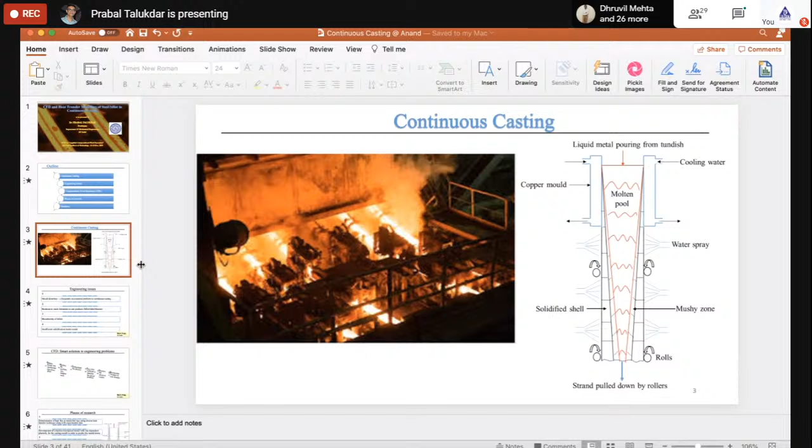Excuse me sir, your slides are not changing. Yes, now it happens when I take full screen mode, then it happens like that. Then I have to do it in presenter-like mode. This is now, I think, visible, right? Yes sir, it is visible. So your screen will be slightly smaller, but then we have to go with this one.

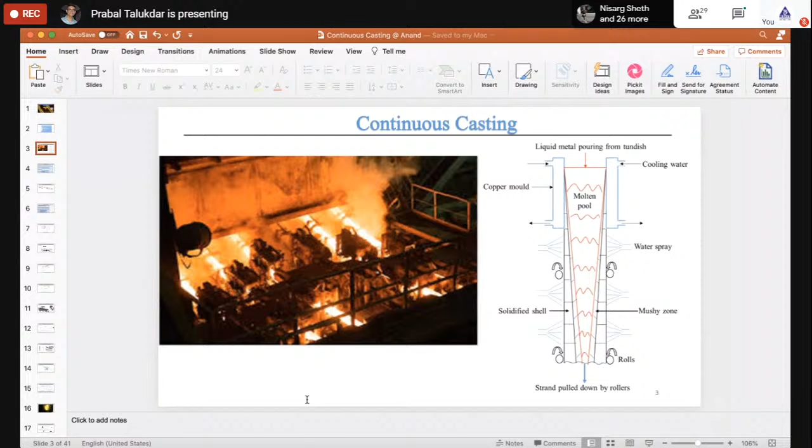It's okay sir, some other view is possible, let me check. Now do you see some changes? Yes sir, changing, right? Can you just change it? Can you change it once so I'm changing now. Do you see, no, is it changing? Not changing sir, it is at your third slide only. Okay, then I'll just leave that. I'll go like this way. I'll try to make it as big as possible.

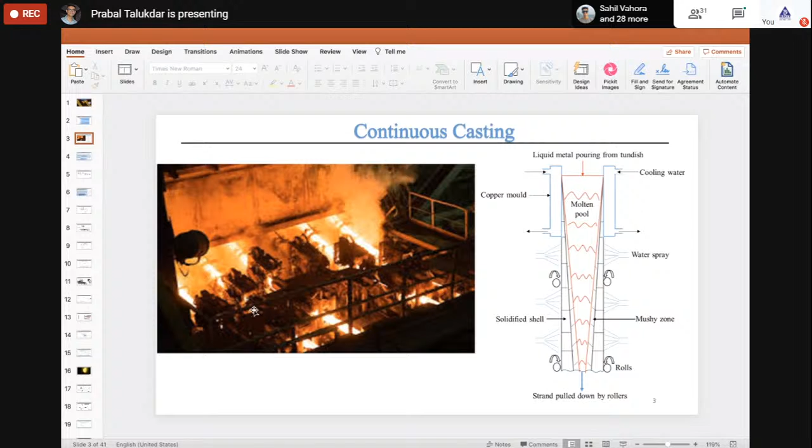Sir, try pressing F5 once and see. F5. In my screen this is becoming full screen, but you are not able to see the changes. Oh okay, I have seen that in some other presentation also. I don't know why it happens with some software. So the only possibility is I try to make it as big as possible. Now I think it should not be a problem. It is visible sir, fine. It's visible and big also, right? Only I lose a little bit of space on top and sides.

Okay, so this is the continuous casting process. This one, the presenter, I think I can... you can see my cursor, right, rotating here, going here and there. Yes, you can see my mouse cursor. Okay, I'll manage with this one.

So this is a copper mold. Molds are basically made of copper because you need a high heat transfer rate through the copper mold. Then there is a liquid metal which is poured from a tundish, from which the liquid metal is poured through a jet. That is not shown here because our area of interest is basically the heat transfer and solidification process.

Inside the mold, so that is why we have taken this portion. This mold is sort of a cut section view. The mold is basically a rectangular structure in which both the top and bottom are open. This is not a closed space. It's like a sort of rectangular channel which is kept in a vertical direction.

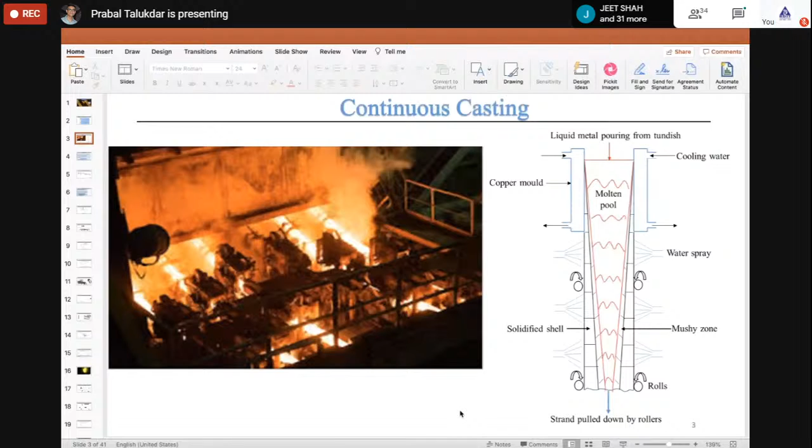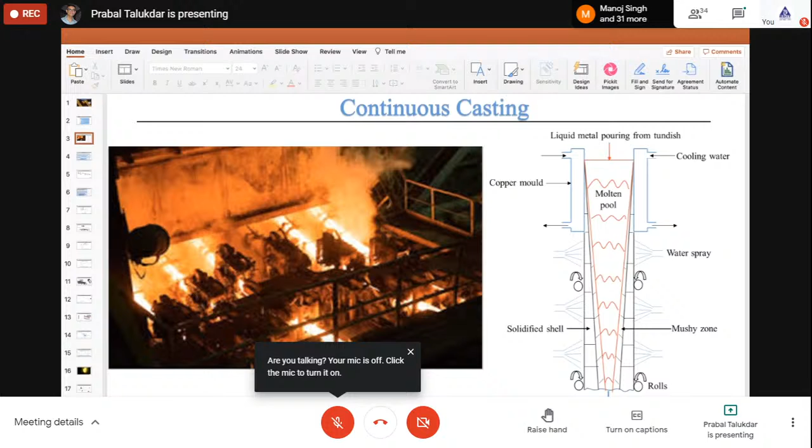would not give you any interest. So I won't make my slides very technical, because you may not be able to understand, since you're all from different backgrounds, and this is a particular area of research. So I will try to give you an overview of this casting process, so you have something in mind to understand.

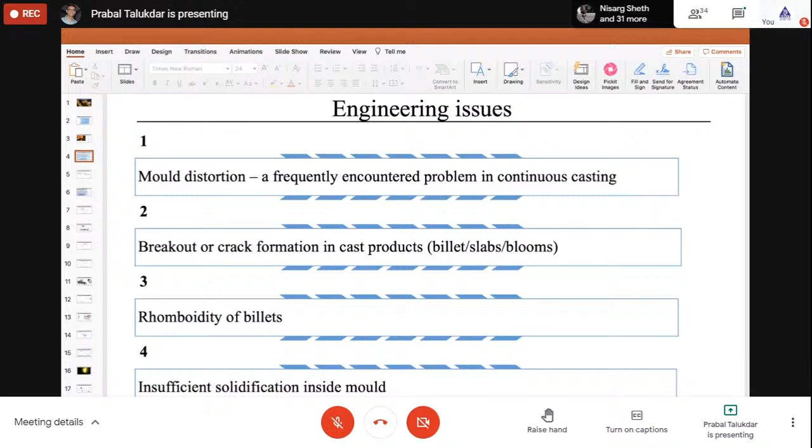These are the engineering issues which happen with continuous casting process. The first one is the distortion of mold. The mold is that rectangular channel I have been mentioning, which is the geometry that gives the shape of the solidified steel. This mold, although made of copper, is exposed to very high temperature molten steel.

It gets different stresses, including thermal stresses, and because of that, the mold actually distorts after a certain period of time. It may work for one month, two months, one year, but over a period of time the mold might distort. If there is distortion of the mold, that means its shape is changing, so all your calculations don't work. You have a certain taper in mind at the design stage, but later its shape has changed, so the product of steel you get from this mold could be different.

So mold distortion is one phenomenon which is important to study - what is the amount of shrinkage or deformation you get in a mold. Because if there is more distortion in the mold, maybe you have to increase the cooling liquid so you can keep the mold temperature lower. Maybe the casting speed also has to be changed, so the mold can last longer. Those kinds of remedies can be taken.

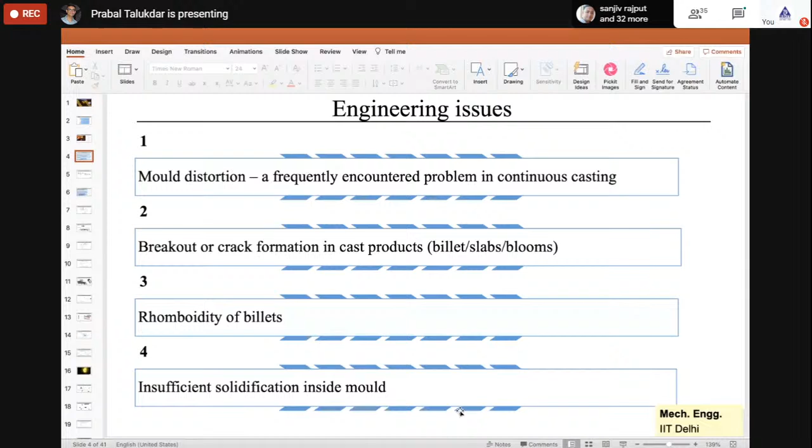This insufficient solidification basically brings out crack formations or breakout, whatever happens. So these are the engineering issues, and in order to resolve them we take several remedies.

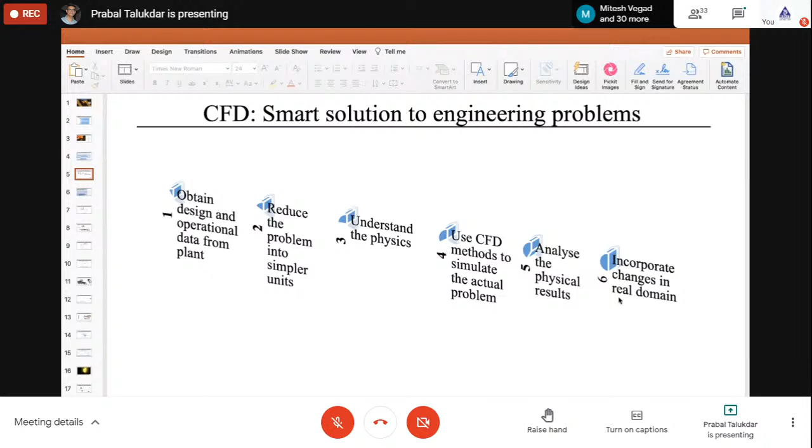That is why all industries these days do some sort of numerical simulation, CFD. Some 10 or 15 years before, CFD was an area where only a few people worked, mostly in academics or a few industries. But now everyone is working in CFD, because commercial software is available and has been made very friendly, so people are using it in many applications.

Just pick up any application of heat transfer and fluid flow, people have been working in CFD - starting from bioheat transfer, aerodynamic design, chemical processes, fire problems, atmospheric problems, simulation of computers, and everywhere. CFD has been a big tool these days, and I'm sure in this course people have given you an overview of this kind of problems.

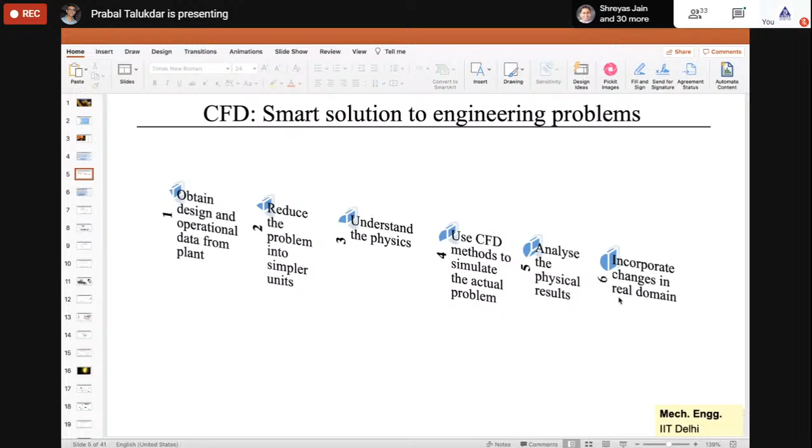So the next topic is the phases of research, what I'm planning to discuss here. This diagram is a little more elaborate, so I have to explain it again.

This is the jet through which the liquid metal comes. Normally from the tundish, through a jet, the liquid metal is poured into the mold. This is the jet through which it is coming, and this is the liquid steel.

In between, if you see that yellow dash, that is the solidified shell, which I am mentioning as strand - the solidified shell or solidified strand. This is called a shell because it is only at the outer periphery. This gives you a solid boundary, and inside that you have liquid metal, because initially you have only a solid shell in the beginning, and then gradually everything becomes solid. So that takes some time.

If you see here, there is an air gap - that white color shown here is the air gap. Why does it happen? Because this solidified shell is compressed due to the change in density. There is shrinkage, and because of that there is air gap formation, which affects heat transfer. If you can make your mold slightly tapered to the inward side, this air gap will reduce, and if the air gap is reduced, your heat transfer will be very good. That is why you need to do numerical simulation to predict this air gap, which is what we have been doing in recent times.

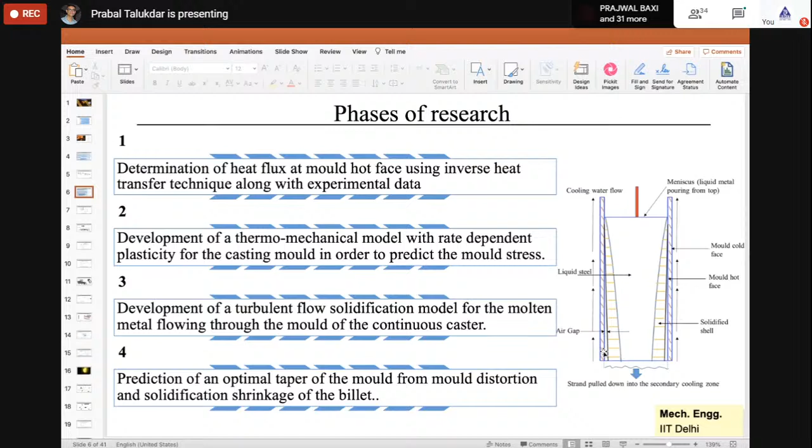So those are the different phases, and beyond that I will also explain that without finding the heat flux, the whole problem—mold and billet together—can also be solved together as an integrated problem. We have done a 2D analysis of that, and also a 3D CFD analysis. So there are several phases we have done for this problem, which I'll try to explain in a comprehensive way.

So this is the first part of the problem, where we used the inverse technique to find out the heat flux. Take any mold—like this rectangular mold shown here—liquid metal comes from the top and goes out. You take any section of the mold, and this is the section shown here.

From the industry, they use certain sensors, and from those sensors they get certain temperature data in the mold. Now in this problem, we know some temperature data, but the boundary condition—the heat flux inside—is not known to us, because that is what we're going to predict. So the boundary heat flux inside is unknown to us.

The outside of the mold cooling condition is known to us, because we know the water flow rate and the properties of water, so we can calculate the convective heat transfer coefficient. So we can have a convective boundary condition outside the mold—on the left-hand side where the water is flowing, we can have a convective boundary condition there.

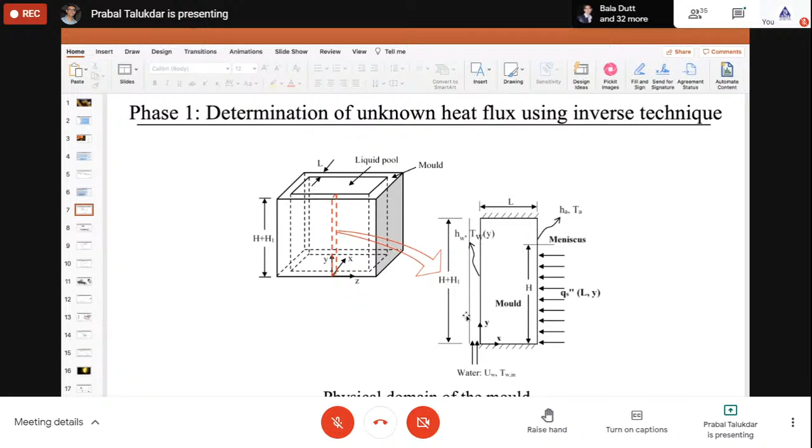So these are all known conditions. This boundary is known to us. Upper top and bottom can be considered adiabatic, because there's very little loss of heat through these two boundaries, since heat transfer is dominantly happening in the x direction. The only thing unknown to us is this heat flux, which we need to calculate.

So in a direct problem, you cannot solve it, because in a direct problem you need to know your boundary conditions. So it's an inverse problem. We have some information about the temperature, so we use the conjugate gradient method, and using this method we determine the heat flux at this mold.

I think Dr. Ajit Parwani has given you a lecture a few days before. He worked with me on the inverse problem. He was the first PhD student who worked with me on this. Of course, Mitesh was my first PhD student overall, but he worked on other problems. Ajit worked with this problem, and we basically developed the conjugate gradient method from that time.

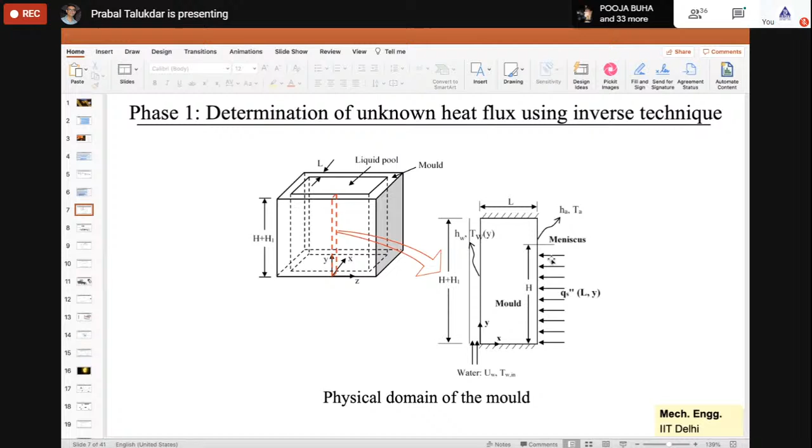For this part of the problem, another student, Dr. Udayraj, who is now a faculty member at IIT Bhilai, worked on this and predicted the heat flux using the conjugate gradient method. I won't discuss the conjugate gradient method in detail here, since that's a topic for another lecture.

So in this problem, it's basically a two-dimensional heat conduction problem, governed by the Laplace equation. In an inverse problem, you assume a certain heat flux in the beginning, because the boundary condition is not known to you. From that assumed heat flux, you get a certain temperature distribution.

That's the T, and these are the temperatures measured by the industry, given to us as data. Whenever your heat flux estimation is correct, the difference between predicted and measured temperature will be very small, going to zero. That's your objective function for the problem.

You assume a certain heat flux, get a temperature distribution at certain points, and compare that predicted temperature with your measured data. If they match, your objective function is satisfied. But that doesn't happen so easily.

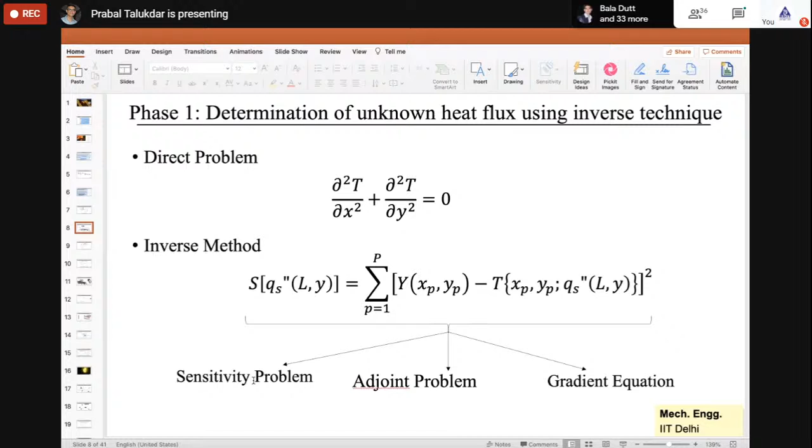So you need several iterations to get a good heat flux that drives the objective function to zero. This involves solving several problems: the sensitivity problem, the adjoint problem, and the gradient equation. These equations need to be solved under these different problem names, and from that you predict the heat flux. I won't discuss that in much detail.

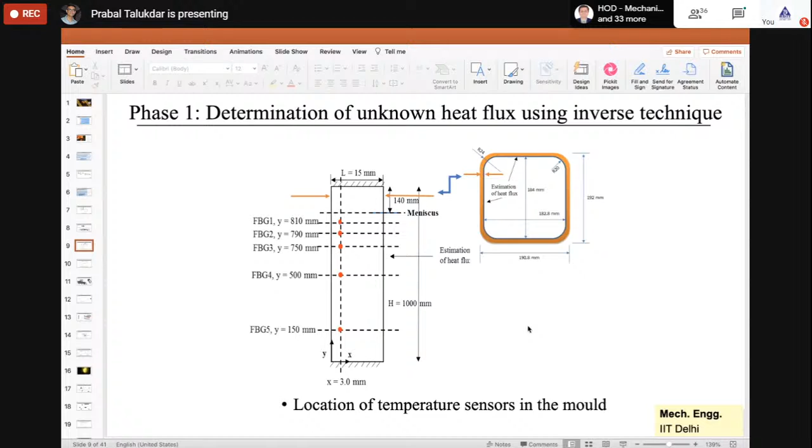These are the temperature information we got from the industry. At different points they measured, from the operational plant, what the temperatures were, and from that we predicted the heat flux on the right hand side. It was a challenging problem - not easy to predict the heat flux on the hotter side - but eventually we were successful in getting these heat fluxes using that method.

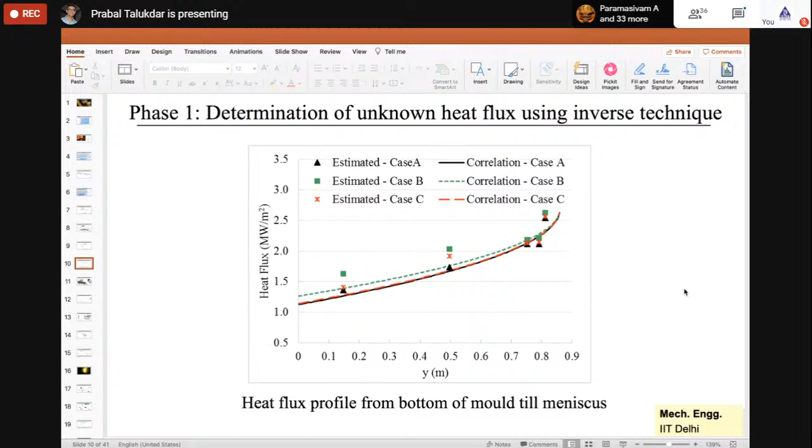Then this is the thermomechanical model, which I won't discuss much since this is another domain you may not be familiar with. For the thermomechanical model, first you have a thermal model, because the heat flux is known to you from the experiment, from the inverse problem.

With those boundary conditions, you do simulations - the 3D simulations you can see here. We have taken only one boundary because these are all symmetric, so instead of taking the whole domain, you take a slice, and there's an arrow shown here, a mark here.

So this is the domain which we have solved because it is a symmetric problem, and that has been shown here. Inside the mold you have a transient heat conduction equation, and from that, prediction of heat flux which we have got from the previous problem, that actually extrapolated to a two-dimensional plane, because we only got a one-dimensional plane from solving a two-dimensional problem. This is a three-dimensional problem.

So heat flux normally is almost constant along this direction. Only at the corner the heat flux is a little less, and there are standard relations between the heat flux at the corner and heat flux at the off-corner region. Using those standard relations, we have predicted the heat flux all along this line.

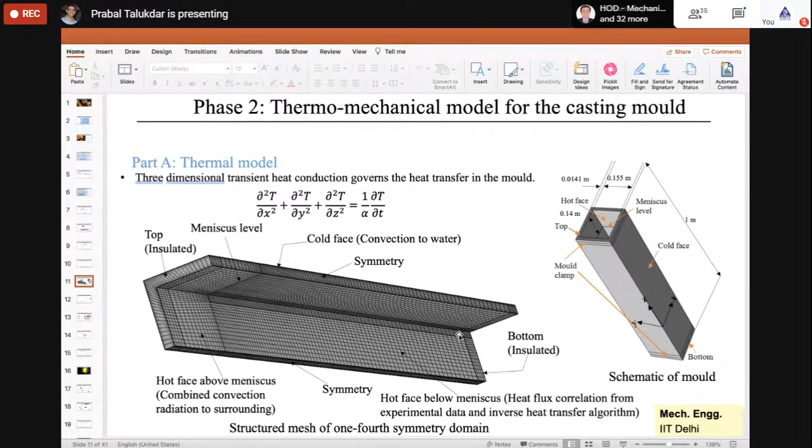So by that we solve the problem. This shown is the corner heat flux, this is the off-corner profile which we have got, and the corner profile heat flux is slightly lower. So that is why there is a difference between the heat flux of the corner profile and off-corner profile. That is a certain relation people use, and we have used this relation, but later on we have actually predicted the corner heat flux also.

Initially we used this relation for the mechanical model, but later another student who is working on inverse heat transfer has worked on predicting this. And then we basically have the corner heat flux profile also. So with this thermal model, we've done the temperature distributions.

Okay, I'll come back to this one also because I have taken this slide. This is another student, Anand Srinivasan, who is doing his PhD, almost at the end of his PhD now with me. He has done a two-dimensional analysis with a different kind of mold, where we have temperature distributions not only along one direction. In the previous problem I showed, we know temperature data only in the y direction, but in this problem we have temperature in the x direction also.

We have a lot of thermocouples in this industrial mold, data which we got from the industry. So in that case we are able to do a three-dimensional simulation of the inverse problem, from which we got the heat flux profile.

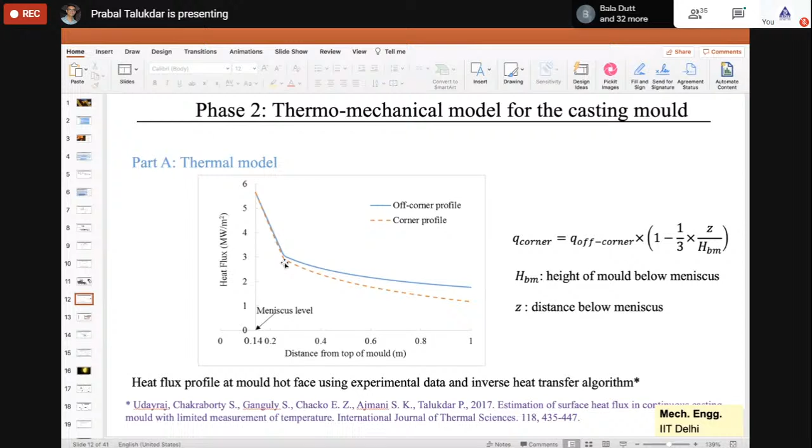So heat flux doesn't change the way we showed in the previous slide, where there's a drastic change. It doesn't happen like that. It gradually changes. There you see corner to off-corner profile are all the same, but suddenly there's a change. Whereas in this case, the heat flux changes gradually from the corner to the off-corner region.

So that's the prediction he has done with his inverse problem using some other technique, not the conjugate gradient method. He has used some other technique, and he has also found that the corner heat flux is different than the heat flux at the rest of the domain of the mold. So that has been predicted by the student.

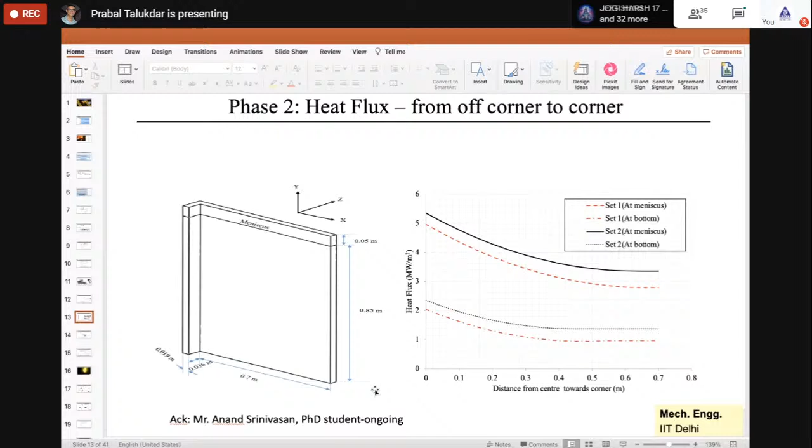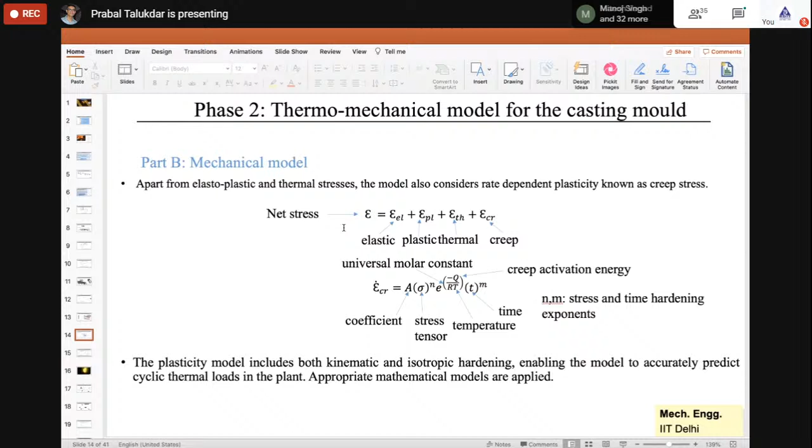Now again, going back to the temperature profile, we have solved the mechanical model where different stresses have been incorporated in the COMSOL mechanical model—elastic, plastic, thermal, and creep stress, whatever stresses may be encountered in this problem. From this we have calculated the total stresses, and from there we have calculated the deformation of the mold.

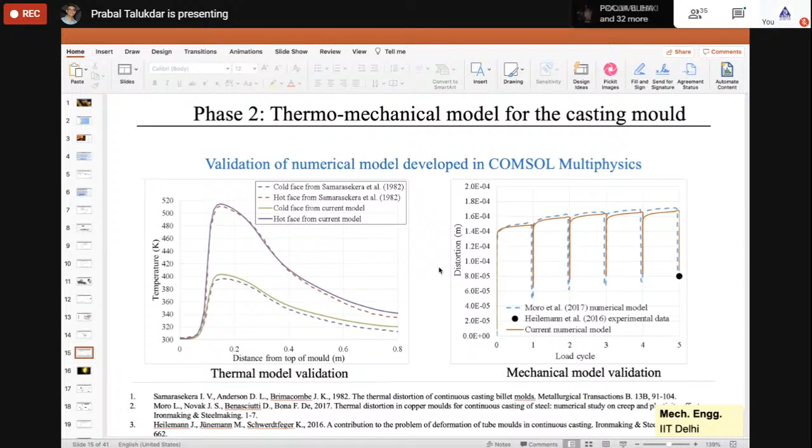So there is some result validation we have done with the literature so that our mechanical model is correct. There are two validations we have done; I am just showing you for this problem. Then from that, basically, we have predicted the deformation of the mold.

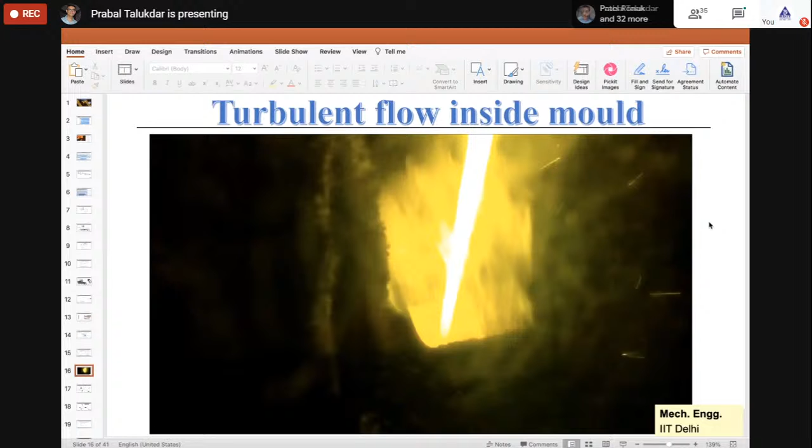So I'll come back to the deformation of mold in a later slide, but now we are going to discuss the turbulent flow simulation inside the mold, because the previous discussion was the heat transfer in the mold. Now heat transfer in the billet, which is basically the central portion where molten liquid is solidifying. That's the portion we are going to discuss.

In this case, we have solved a three-dimensional transient turbulent flow model, and the basic continuity and momentum equations need to be solved here for the flow field, and of course for the energy, we have an energy equation. What is done here is that there is solidification happening.

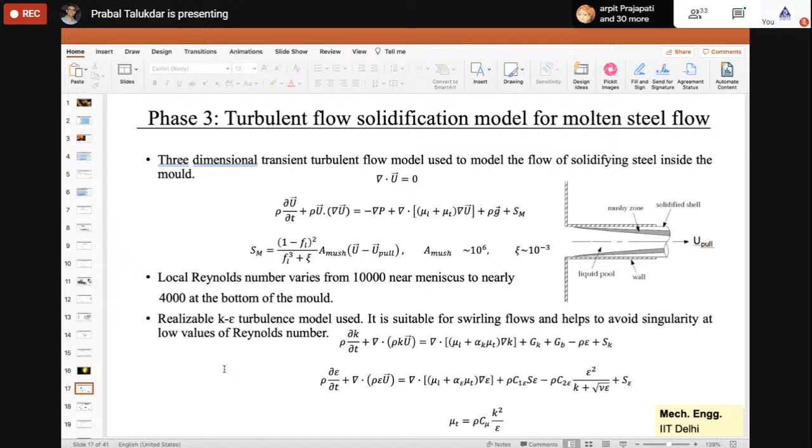These are the equations which help solve it, and these are the turbulent equations which we have used. We have used the realizable K-epsilon turbulence model because this is basically good for swirling flows. We tried other turbulence models also, and convergence was very difficult with them, and finally we converged to this turbulence model for this problem.

Then for the heat transfer, these are the energy equations. Now, the heat transfer here is a phase change process, so you have both sensible heat transfer and latent heat transfer. That is where the enthalpy is split into sensible enthalpy and latent enthalpy. If you add the sensible enthalpy and latent enthalpy in the energy equation, given in terms of enthalpy H, you get a

more detailed energy equation, where you have certain extra terms - this one coming because of the latent heat, and this another term, an advection term, because of latent heat. So these are the two extra terms, which are basically termed as source terms in the energy equation because of the solidification model. So this is the energy equation which needs to be solved here.

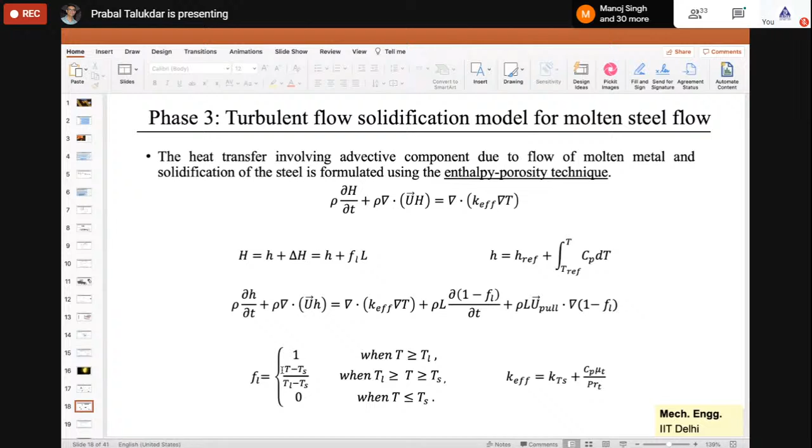F is the liquid fraction. When it is completely liquid, the value of F is equal to 1, and when completely solid, it is 0, and in between this is calculated by T minus TS, the solidus temperature - that is the temperature at which it still solidifies. TL is the liquidus temperature, the temperature at which it becomes completely liquid, so TL minus TS. This is sort of a porosity in this problem - you can view it as a porosity, which is the liquid fraction, which is important here.

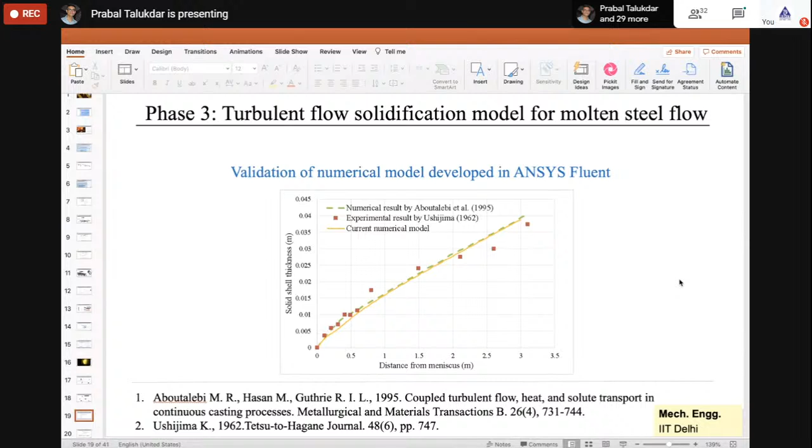We have of course validated our numerical model for a circular mold. Our molds, as I've shown you, are rectangular or square molds, but we did not find any result available in the literature which is very close to our simulations. We found a round mold, and for that round mold we have done simulations, and then we have validated against the numerical results from the literature.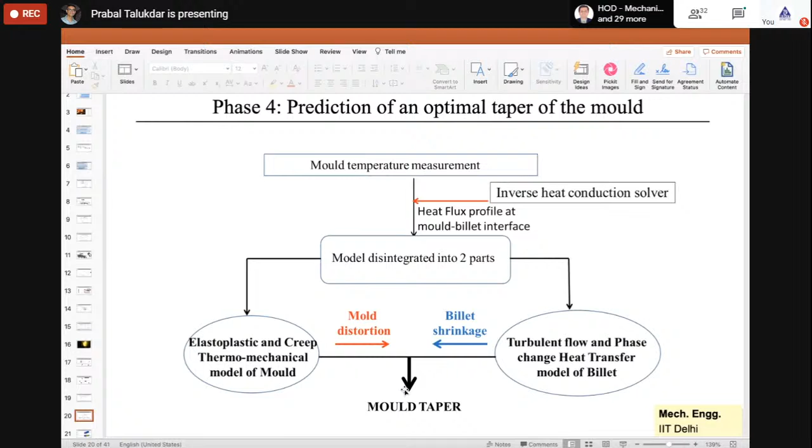So there are some results which I am showing here. These are the results for the mold. You can see the inside of the mold is hot, because the molten liquid is flowing through this mold. That is why you see the red color, which is extremely hot, close to the meniscus.

This line is the meniscus line, because meniscus is the surface from which the liquid level starts. So it is very hot here and gradually it cools down, and outside is sort of cold because there is water flowing outside the mold. But this part is a little hotter because it's at the top of the mold. The temperature outside the mold is not very high, somewhere in the range of 400 to 450.

So the deformation of the mold is not very much, even though we were thinking there could be a lot of mold deformation. But mold deformation is very small compared to the deformation of the billet, although whatever millimeter or micrometer deformations we have are also important for an accurate model.

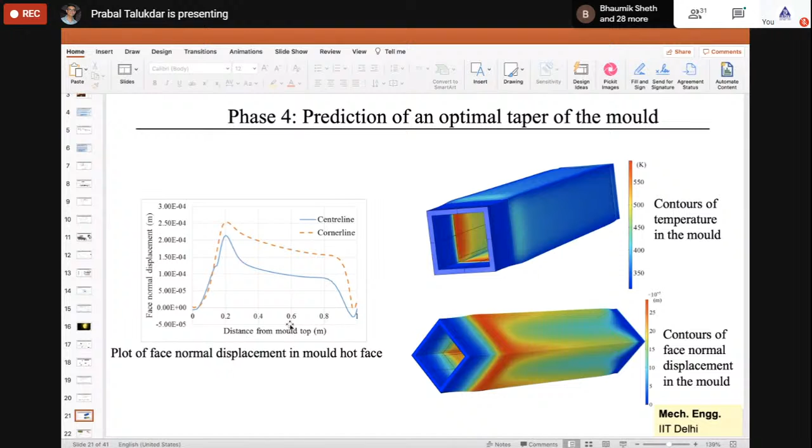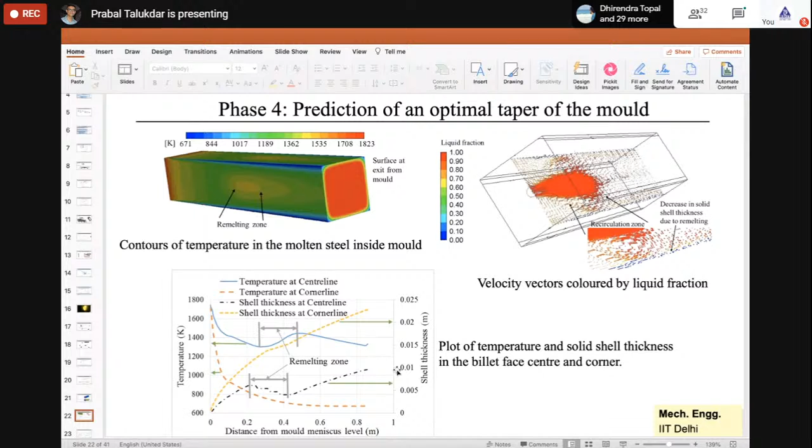I have an even better diagram which can show the remelting thing. At the end of the mold, you can see this solidified thickness is something like 0.01 meter, like 10 millimeter thickness of the shell which we are predicting, which is very close to the shell thickness one gets in industry.

So based on our observations, we have suggested them about different tapers which can be used. The existing design has a continuously decreasing size of the mold. The taper is sort of uniform from top to bottom.

This is distance from mold center to the face center, and this is distance from the mold meniscus level. If you can see here, the distance is gradually decreasing, that means your taper is uniform from top to bottom.

But what we are basically suggesting is that you should have different tapers for the center, and different tapers for the corner, and it should not be the same taper everywhere.

You should have more taper at the beginning, close to the meniscus, because there is more deformation in the beginning. Followed by that, you don't need any taper for a certain portion, which is basically the remelting portion. And after that, you should again have a taper, not at the same rate as at the beginning, but at a slower rate.

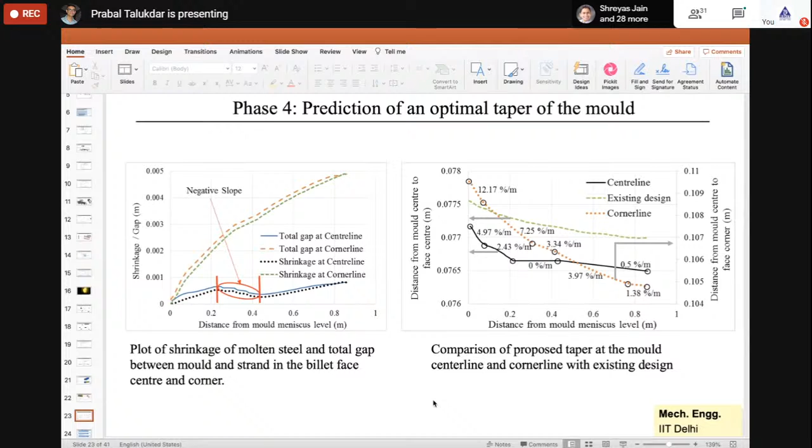So all these percentage taper calculations are what we have predicted for this problem. Now the summary of this part of the research is given by this one. I think I don't need to explain this again.

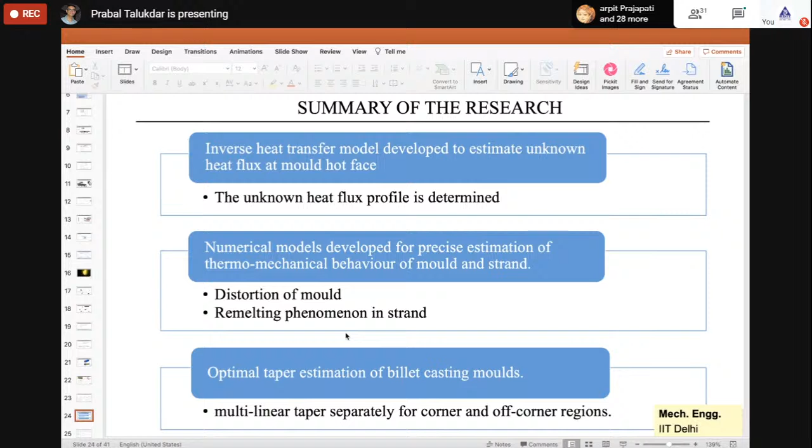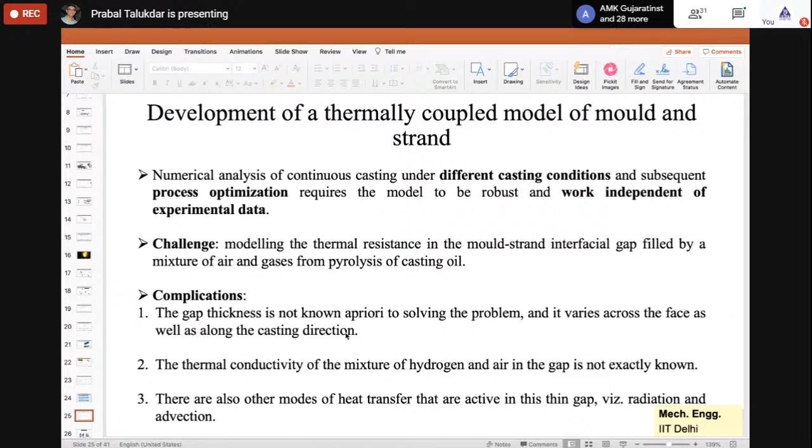I have a few more things to show you, which I'll show in the next part. I think I have another 10 minutes of time, is that right? Yes sir. So what I'm planning to show here is that we have done this problem.

The previous cases I showed you were basically broken into two parts: one is the mold part and one is the billet part. Then using the same interfacial heat flux, we have calculated the mold taper.

But the problem or limitation with the previous model is that you need certain experimental data, because once you have the experimental data, only then will you be able to predict the interfacial heat flux. If you don't have interfacial heat flux, then you won't be able to do that problem.

Getting interfacial or experimental data for every problem is a little difficult, because you need to do experiments for all kinds of problems, and then predict temperature, predict heat flux from the experimental temperature data. So that is not always possible.

That is why we developed another model where you don't need experimental data all the time. You need to do the experiment once, get certain information from that, and then without experimental temperature data, you'll be able to simulate the mold. That's what I'm trying to discuss in these 2-3 slides.

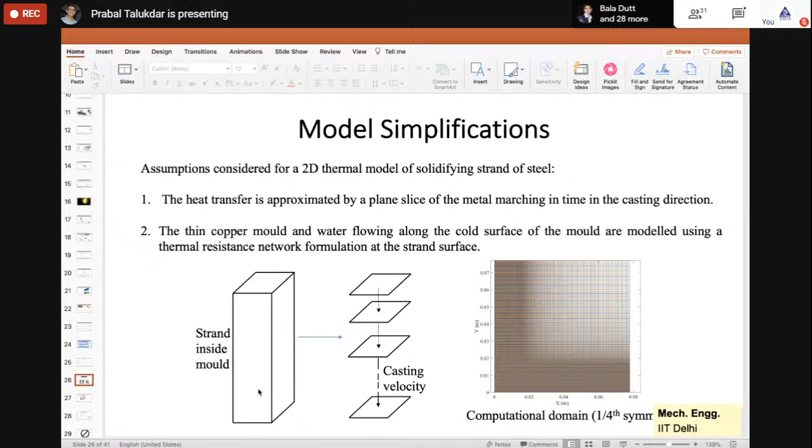So if you can calculate all these resistances based on resistance network analogy, you can calculate the total resistance. Once you know the total resistance, you can calculate the overall heat transfer coefficient, and that can be considered as the boundary condition, so you can solve the billet problem with that. Mold will not come into picture here. You don't need any interfacial heat flux condition, because now your boundary is a cooling boundary with a convective boundary condition. So no heat flux is required now, only the overall heat transfer coefficient, which has three resistance terms: 1, 2, and 3.

The first resistance is because of the cooling channel, mold to water, the resistance outside the mold which you get because of the boundary layer from the cooling water. The second is the resistance because of the thickness of the mold. The only problem is with the third resistance, which is because of the air gap. Although you don't need interfacial heat flux here, the problem is you still need this resistance, and it is not known to you.

This air gap, Saurav was able to calculate using a simple mass balance. He was able to calculate the shrinkage, or the gap formed because of the shrinkage of the solid material, by doing a mass balance, and from the density difference he was able to calculate this Tg from the model. He used these relations from the mass balance, and at every iteration he calculates what air gap forms because of the contraction of the solidified metal. So that Tg is known to us from the simulation.

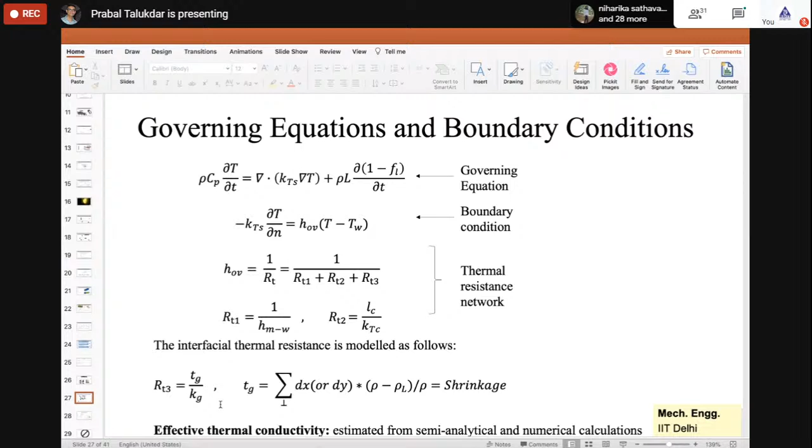These are some simulations we have done. If you see the Kg values, we have varied the conductivity of gases from 1.8 to 2.2, which is not a very drastic range. This is the simulation with known heat flux, which we already know from our experimental data. If you see, they all match, and I think the value Kg equal to 2 is considered to be the best one, because we have also compared it with the solidified shell thickness.

If you see, the black color is the simulation with known heat flux from experimental data. At the end, the solidified shell thickness matches very nicely when we assume Kg is equal to 2 watt per meter Kelvin. Although all are good, 2 watt per meter Kelvin is somewhat very close at this portion.

Here they are not matching much, but at the outlet of the mold, matching is more important, because that gives you basically the prediction of the solid shell thickness. So that is why it is considered to be the best one.

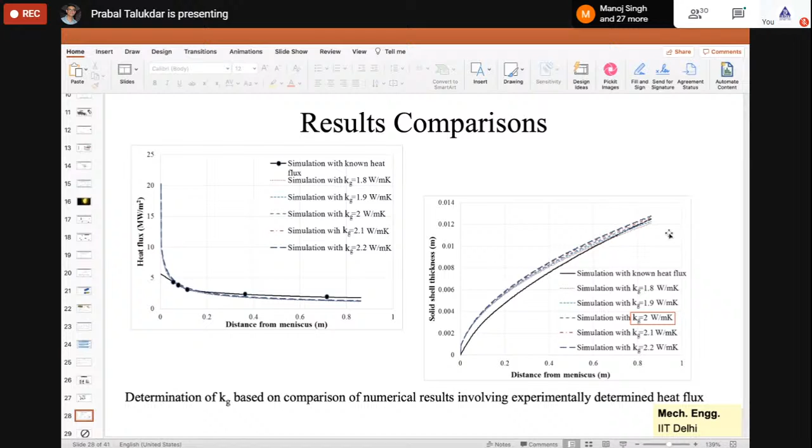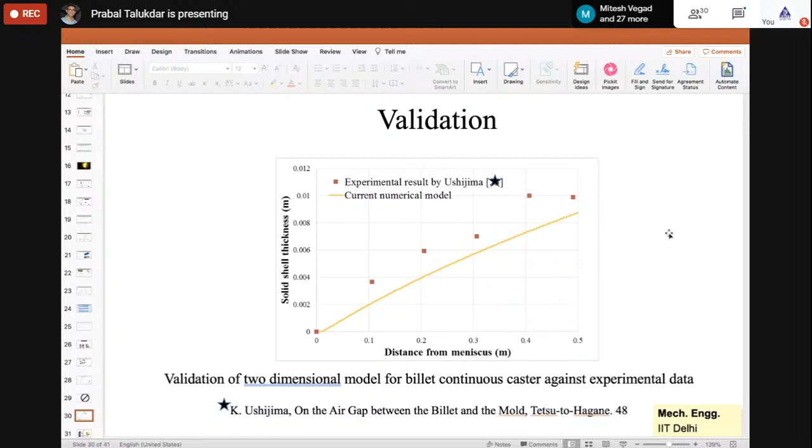So that's the overall two-dimensional model, which is much more successful, and of course we have published a paper on that also. We have also done a 3D model, like the other student Jaya Krishna is working with the 3D model, where we have done basically three-dimensional simulation of the mold. I am not going to discuss that because I don't have time now.

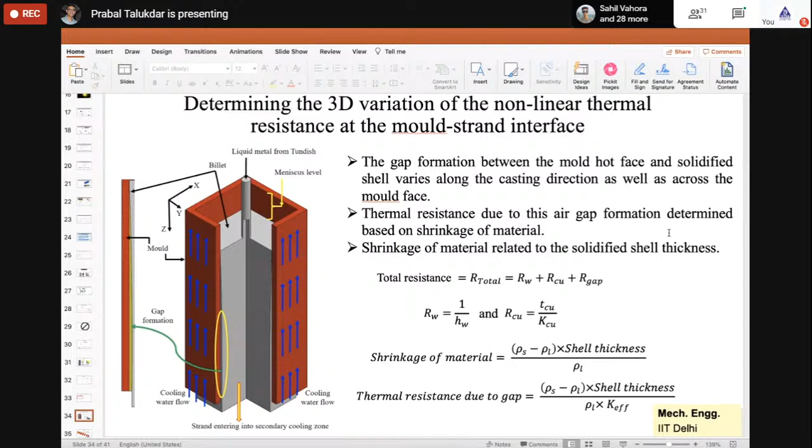In the 3D model, we are not doing it like a two-dimensional problem, marching in the flow velocity direction from top to bottom. It's not like that. Now it's a steady state problem with a three-dimensional mold, and we have done it in Fluent, and we have got similar results.

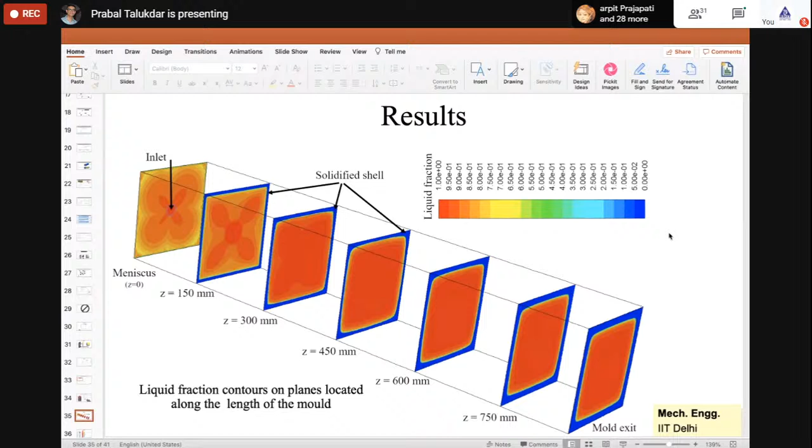Many things you can see from the CFD results, like this remelting phenomena which we have observed previously, the 2D model is not able to capture, because in the 2D model there is no turbulent flow simulation. Only in the 3D model we have fluid flow simulation, so this gives more insight, but of course at the expense of a large amount of time.

For the remelting, you can see the recirculatory flows, because the flow comes from top, and because of the high velocity there is suddenly a recirculation that happens here, and because of that again the solidified shell starts melting in this site. So that is why the break, and the shrinkage and heat flux changes happen in this region, which is an interesting phenomena we have observed.

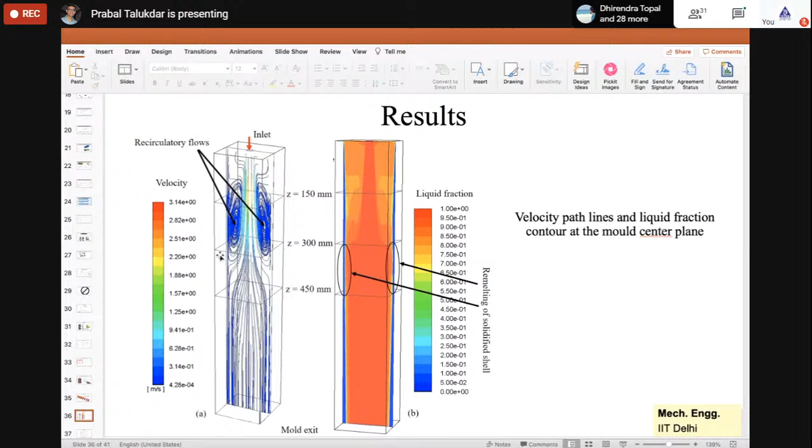No one has observed this in billet casting. People have observed it in other casting, but in billet casting we have observed this, another important issue in this problem. So some of the results I'm not going to discuss anymore. There are 3 students who have worked on this.

Hello. Sir, you are not audible. I think there is some network issue. Please stay connected.

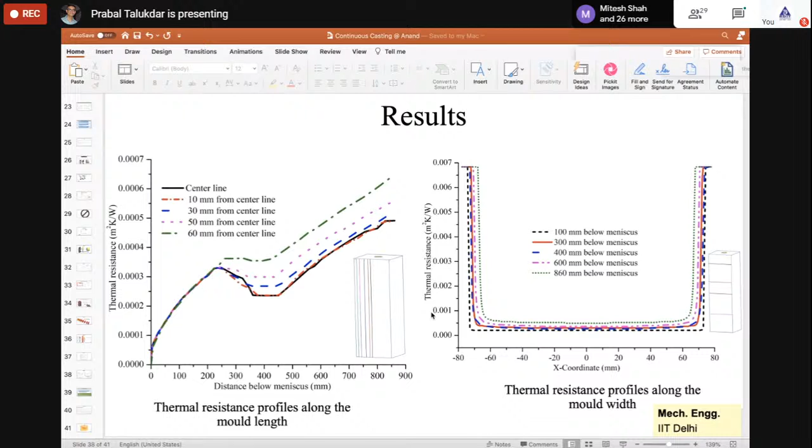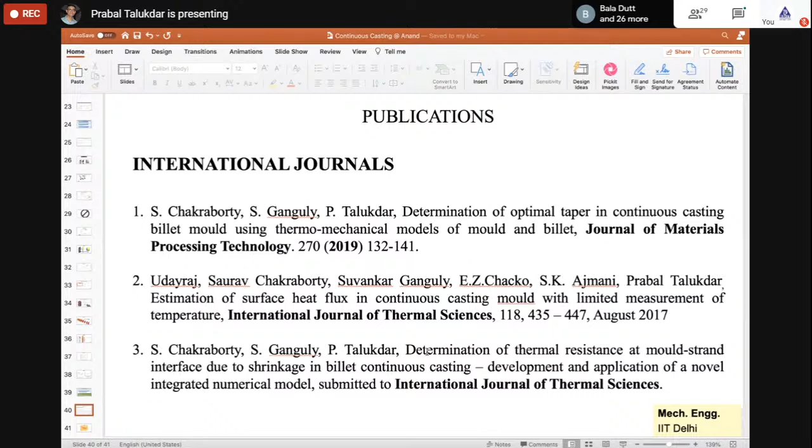And of course, I have taken one slide from Anand also. Srinivas Anand, a PhD student, almost at the end of his PhD, is basically working on inverse problems, including inverse problems in continuous casting, because he has done 2-3 problems on continuous casting. So these are the people who have contributed to this work, and of course we have published several papers. I have not added them, but there are a few more papers we have published in this area. So that's it, if you have any questions, I'm ready.

So, participants, any questions? I hope you are able to understand something, because it's not easy to understand, it's a different area. I did not make it more technical, because then it would be even more boring for you. But in general, you should be able to understand the areas and the equations which are important, some sort of feeling, that's the idea.

Sir, I would like to ask one question: what could be the limitations when we use CFD as a software in such areas? In this case, from a flow point of view, this is not a very difficult problem, because it's a single phase.

It has two different phases though, like the solid and liquid. But from turbulent flow characteristics and all, it's not a very difficult problem. The challenges in these problems are mostly the domain of the problem, because if you want to solve the whole problem together, people have done it starting from the meniscus of the mold, and then after the mold you have spray cooling, and at the end of the spray cooling, finally you get a final shape of the steel. So if you solve the entire problem, the main challenge is computational resources, you won't be able to do it in a workstation or small computer. You need a high performance facility, because the domain size will be very, very big. So that is one thing.